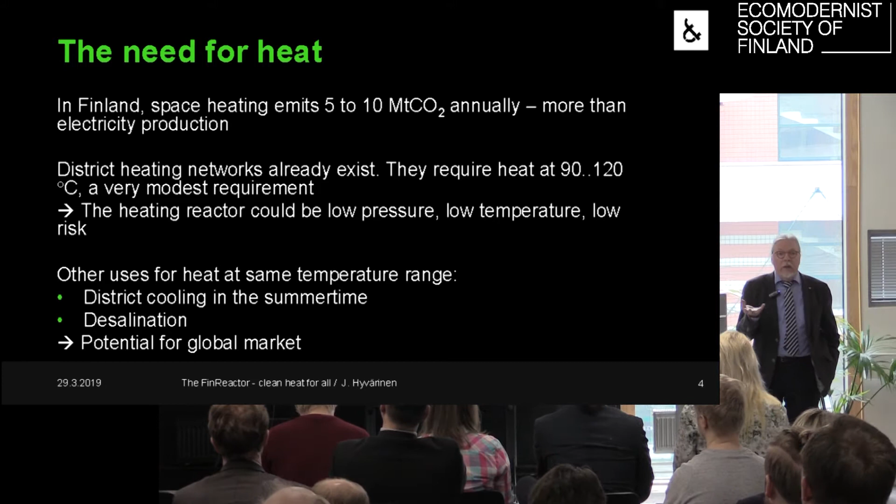District cooling: in the summertime, when there is little demand for heating, there is increased demand for district cooling, and in this city, for example, the municipal power company sells cooling also. So they have built, in addition to the district heating network, a district cooling network. And you can buy cold in the summertime, and it's, I understand, a rather successful product. And then, of course, desalination has been mentioned many times over. So there is some potential for a global market if we can develop something which is cost-effective and easily understandable. So that's what we set out to do.

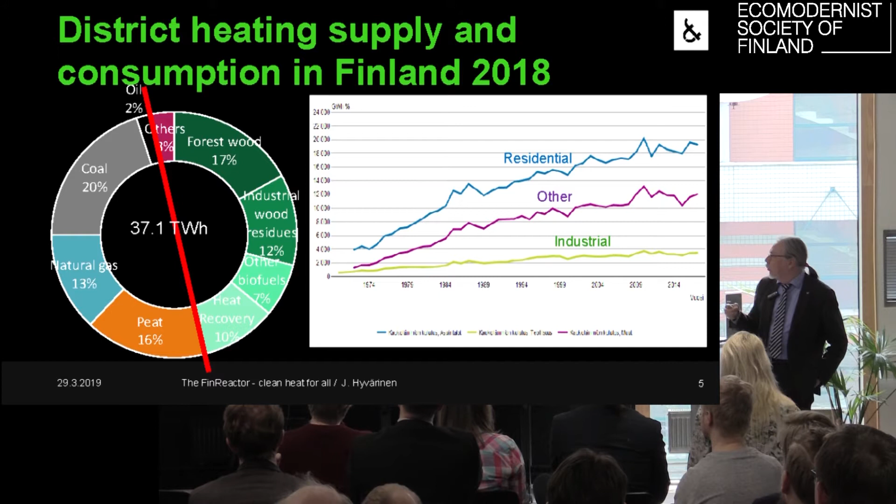Here's just some numbers, a little more up to date than Rauli's. Yesterday when I was coming to Helsinki, I updated this on the train. In Finland, there has been some discussion today about public acceptance, and there seems to be some caution or some fear that the public would be difficult to deal with, and it's a challenge. Admitted, but I submit that Finnish society by and large is ready for nuclear decentralization, and I'm basing my claim on the fact that we have just recently done this with a big power plant project, which is the Hanhikivi plant up here in the north.

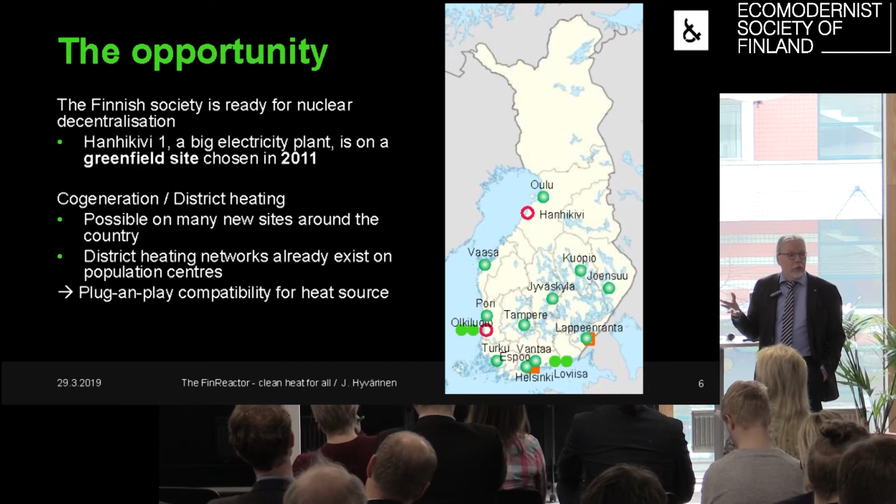And another benefit that you get out of such a small size, which is 10 times smaller or more than anybody else has been talking about, is that even in Finland, just domestically, you get a potential for up to something like 70 units. So there would be a genuine fleet effect. This is very, very important for the practicability and for the competitiveness of such a product. And there would be a sizable number of larger reactors also, something like 10.

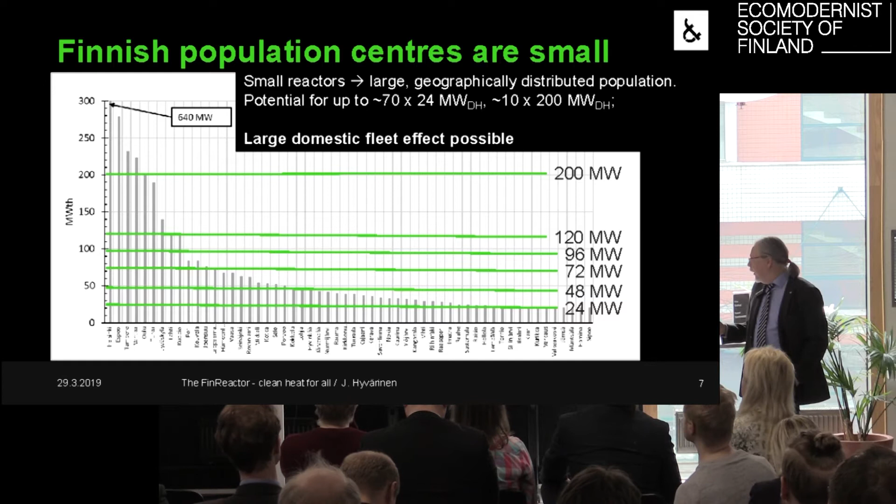The 70, I think in Rauli's presentation the numbers added up to 69, but then you were a little bit more modest in your conclusions, that maybe we should start from, I don't remember, 20 or 30. But anyway, that's already a fair number. So there is a large domestic fleet effect that's possible.

And relatively low temperature, low pressure, as already mentioned, which means that component manufacture domestically should be possible. These should not be too difficult components to make in Finland by the Finnish industries. And in order to simplify life, our life and my former colleagues', the regulators', life as well, familiar light water reactor technologies, materials and fuel would be applied. Those would be readily available on the market, starting from the fuel rods, maybe even fuel bundles.

And I'm bold enough to say that there are no waste problems. I should have qualified that, no technical waste problems, because there may be some commercial discussions around that. But as was already pointed out before lunch, everything that needs to be done in terms of nuclear waste management for light water reactors, we already have. So it's just a matter of licensing, allowing these things to be done, and companies willing to sell these services at a reasonable price.

And finally, my main hobby horse really, simplicity, which is necessary for low cost, simple regulation, and also high safety. It has to be very, very simple in order to be cost competitive. As has already been pointed out by my friend Krister here, you have to get rid of a lot of stuff that you have been used to in the past in order to keep the cost down.

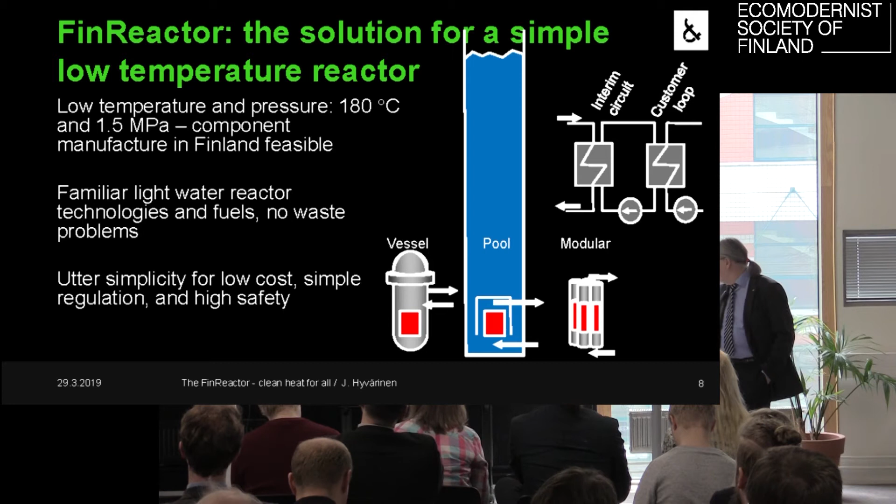Energy efficiency for a pure heating reactor would be like 100%. We would need some electricity to run some pumps and so on in the plant, but the energy that we put into the plant actually gets converted into heat ultimately, and heat is what we sell. So below grade siting helps with external threats. Unmanned operation should be possible, so remote operation from the headquarters of the owner.

Scalable modular design, standard industrial components, standard industrial heat exchangers, for example, and valving and so on. We need to design this so that we need a very, very small amount of equipment in higher safety classes. So a minimal amount of safety classified systems, structures and components. We can't get rid of having some. We will definitely need safety class 1 fuel cladding, or fuel rods, but not much more. So it must be inherently safe, secure, and also proliferation resistant, obviously.

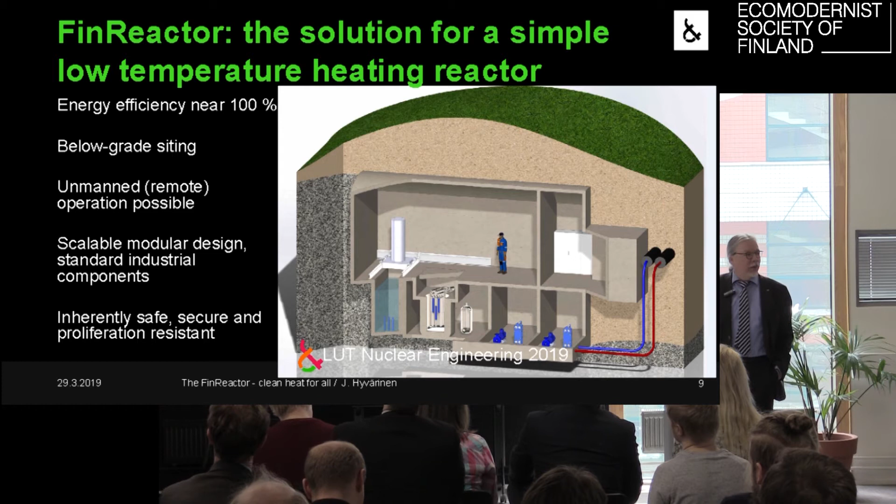Security reasons prevent me from showing you how to get in there. As you can see, this is underground and there has to be an access route, but you know, I can't show everything publicly.

Safety. The safety thinking for large reactors has evolved over the decades, is based on the defense in depth principle, and it has gotten quite complicated. And we have, in theory, IAEA safety requirements for system design, which have then been carried over to WENRA harmonized requirements for future reactors.

Safety objectives, I think they are called, for future reactors. 5 different levels of defense are stipulated, but when you look into how these are implemented in real life for the different safety functions like criticality control, heat removal and containment of radioactivity, you will find out that same systems are credited for multiple defense lines. Sometimes there is nothing that you credit, sometimes there is a dedicated system. But in truth, you don't have 5 independent lines.

You just don't. And if you look into equipment, it gets even worse. So you credit the same equipment through all the lines. Same control rods, for example, same containment structure, to name a few things. The same reactor vessel. So in reality, what you have is 2 or at most 3 separate levels of defense. This we can implement in a simplified reactor very easily.

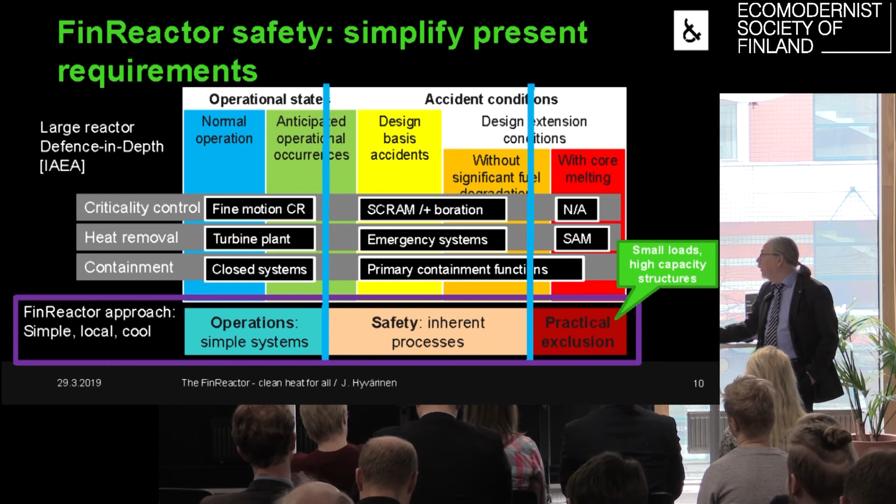This we have to discuss in the light of concrete examples together with the research community and the regulators and the industry. But basically, practical exclusion is feasible whenever you can show that some things are physically not possible. So small loads, high capacity structures, for example, is one way of arguing for practical exclusion. It's not the only thing, but it's one easily understandable way of doing this.

In order to get this done, as has been discussed already earlier today, this takes a bit of revamping of the nuclear licensing practices and nuclear regulation practices so that we enable cost-effective deployment of this technology. And on the licensing side, we need to move from this one-off practice that there are massive mega projects that are licensed once, and then those who survive are happy to never try again. And also the practical implementation and operations oversight

has to be made a little bit more practical than it is today. And like our ministry representative was pointing out before lunch, some of these things have been thought out already. So for example, this is the licensing process, also shown by Minna, and no need to go deep into the details now. Sorry about that. Yes, and the new elements that are needed, we already know roughly what they are, and they just remain to be written in the law and detailed and justified,

and a bit of political process. But I come back to my earlier point that in past history the ministry has been at times very creative in interpreting the nuclear law. So I hope that this could happen again, so that we could, in the context of the present law, already initiate some activities to this end. The purpose of the law and the purpose of regulations is to enable things. This is very, very important. The law and order and regulations and controls that we have are there to enable things to happen.

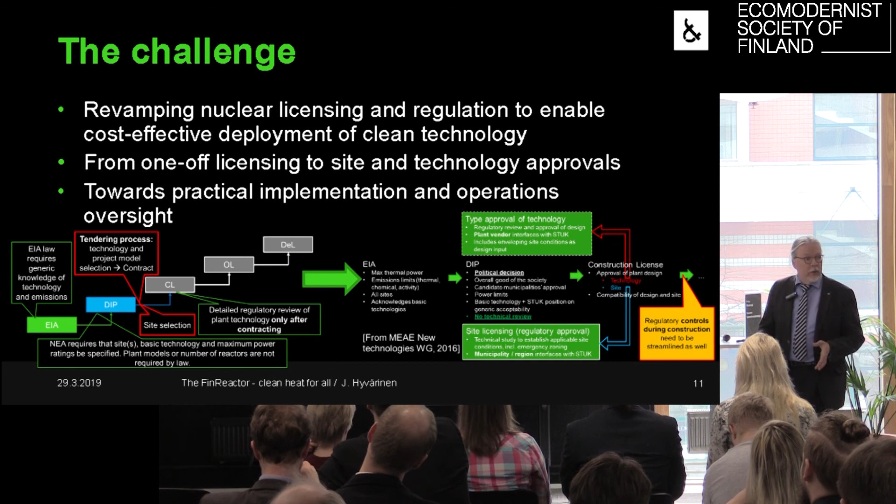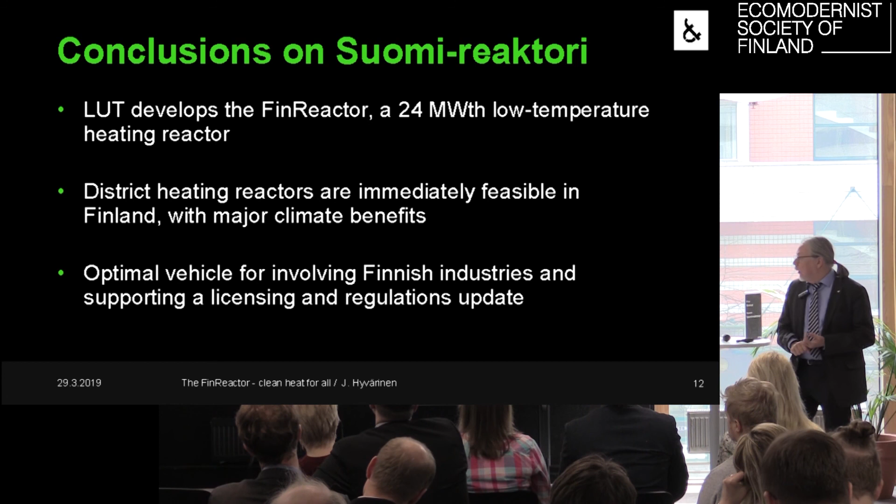So this brings me to my conclusions on Suomi-reaktori, or the FinReactor. We are developing this 24 megawatt thermal low temperature heating reactor. We believe that these district heating reactors would be immediately feasible in Finland, and they would offer major climate benefits. And such a concept would be an optimal vehicle for involving the Finnish industries in more concrete discussions on who can do what and what can be practicably done to guarantee adequate properties for all the equipment and so on, and supporting a licensing and regulations update. So with that, I thank you for your attention.